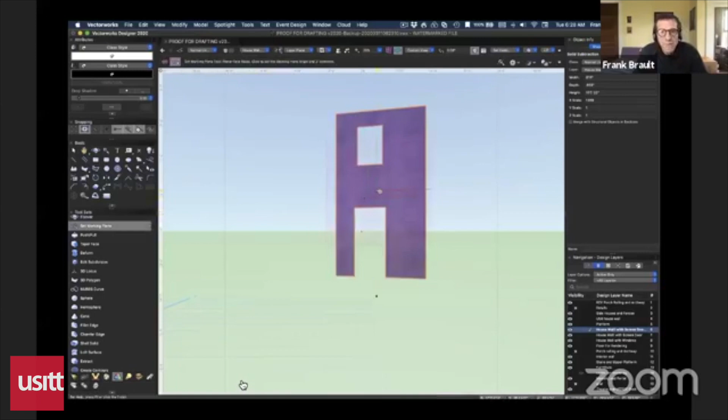If you're working in Vectorworks, you can share the model with your tech, and the tech director will be able to develop their construction documents. Here, I've separated out one of the flats, and I'm using the working plane tool to look directly at it, and now I'm going to use an invert or rotate command to get the backside of the flat.

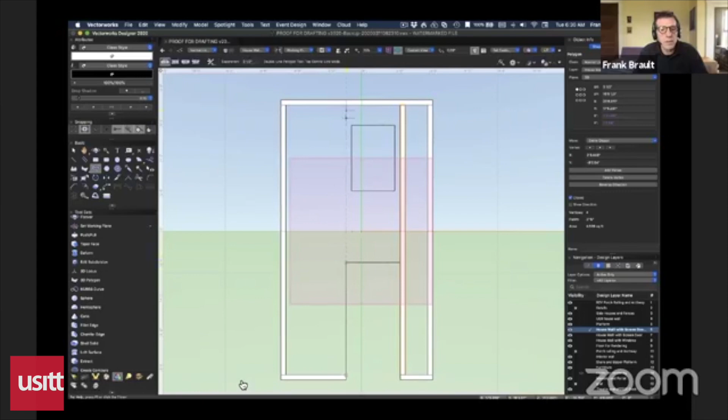Now I'm going to use the double line polygon tool. Not too many people do this, but I'm able to frame this elevation directly on the scenic designer's work, just taking polygons and drawing them out, and it's very quick. I sped up the video here due to time, but it took about 7 minutes to make this all together. Now all I have to do is those pesky diagonals.

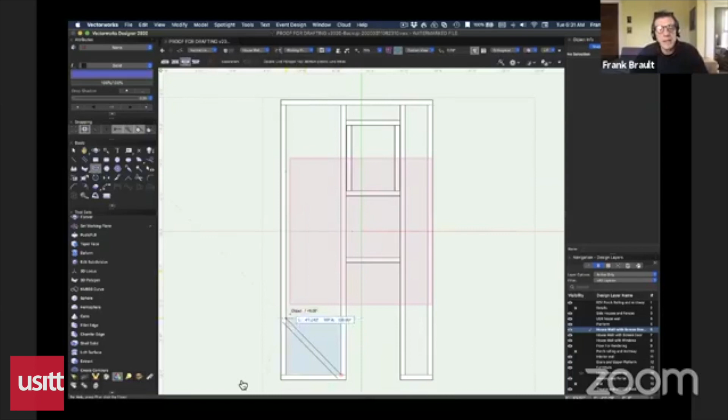For the diagonals, I'm just going to draw them in and let them overlap for a second. Then I'll use Vectorworks' very nifty clip surface command, using the overlapping lumber to make the clip. And there you go.

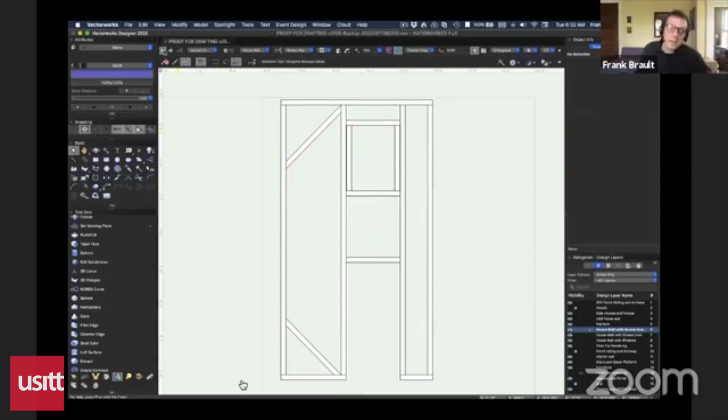So I offset it, and it's ready for dimensioning here. That's about it, looks ready. I'm going to continue.

Seems to be going backwards instead of forwards here. One second, let me get my buttons right.

There we go. So one of the new features in Vectorworks 2020 this year is our interactive patch function for lighting designers and programmers. There's a little video to go with this. It's an entirely new way to patch your show that you will recognize because it's the functionality in lighting consoles very often. You can start by putting your fixtures on the truss the way you normally want to see them.

Whereas in the past, you would use a Spotlight numbering tool, which is still there in case you prefer this method, now you can open up the patch window in Vectorworks, see your fixtures arranged by position or type, ready for numbering. Everything is interactive.

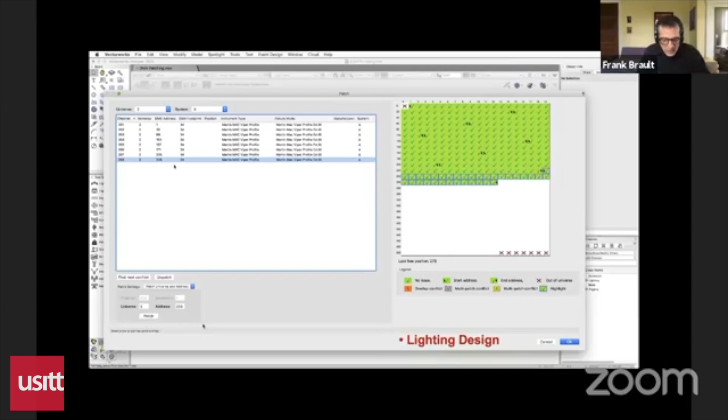It's fault tolerant, where you can start the process of numbering, and if there's a conflict, you can drag the representation of the various fixtures around so there's no overlap. In this example, we have 2 different types of fixtures, and we patch by fixture type. When that's done, we see there wasn't enough room, so then we switch to the second set of fixtures, just dragging that second set to the next universe.

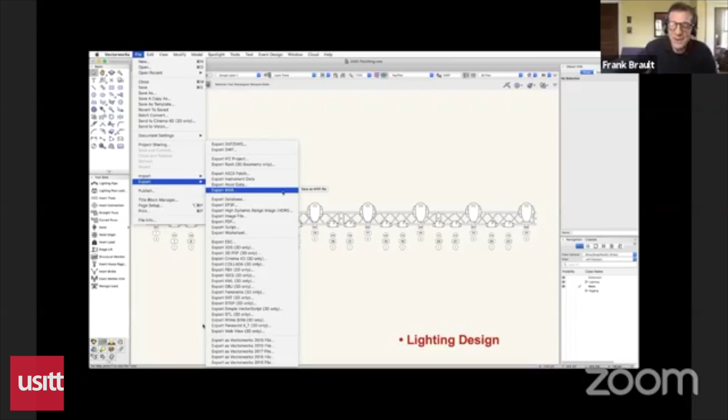So that was pretty straightforward, hopefully. It's a little hard for me to see everything going on at the same time here, but okay.

There's a few rigging updates supported by Braceworks, our load calculation add-on, with hinged truss elements which keep track of the weight applied to the individual sides of hinged truss connections.

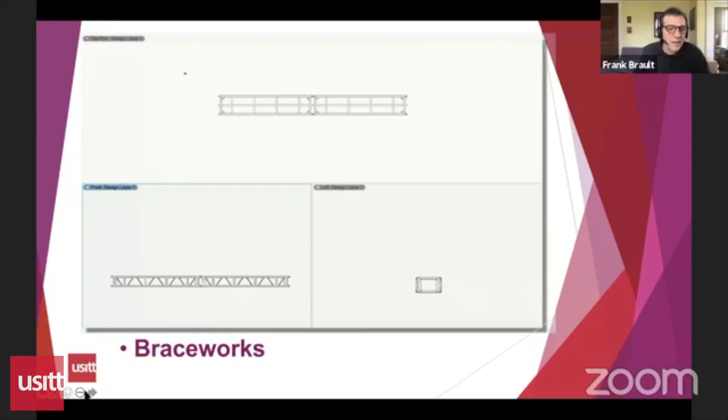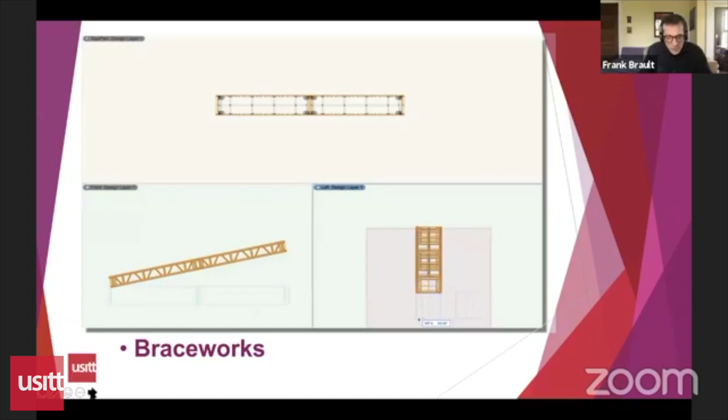I'm going to start the video for this. It's all new. We now support tilted truss so you can use the rotate tool in any view. Now you can have all sorts of tilted truss in your designs, and this has also let us simplify the truss libraries because there's no longer a need to have separate horizontal and tilted versions of our truss objects in the library.

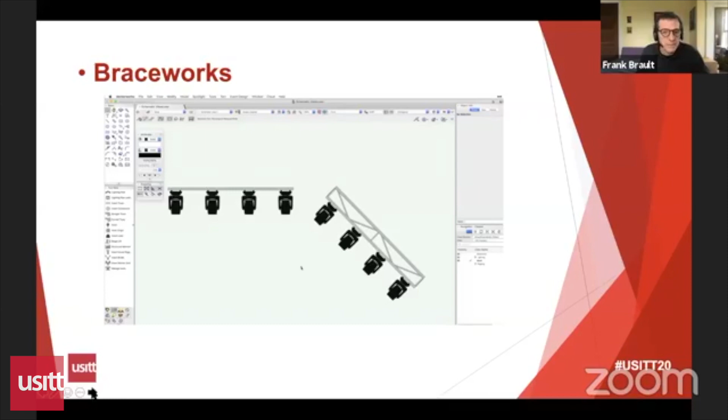When you are working in a model-based environment, you don't want to duplicate any model elements because all your quantity takeoffs are going to be inaccurate. Yet we still want to see multiple simultaneous views so that you can understand all the aspects of the design. So starting in 2020, we now support schematic views of our truss objects.

And I think it's rather well done. The schematic views are exact duplicates, but they don't duplicate the quantities. Here you can see the original truss models and the additional schematic views of the same objects. You can have the truss in top plan and create schematic views that don't show up in the takeoffs. It's like magic.

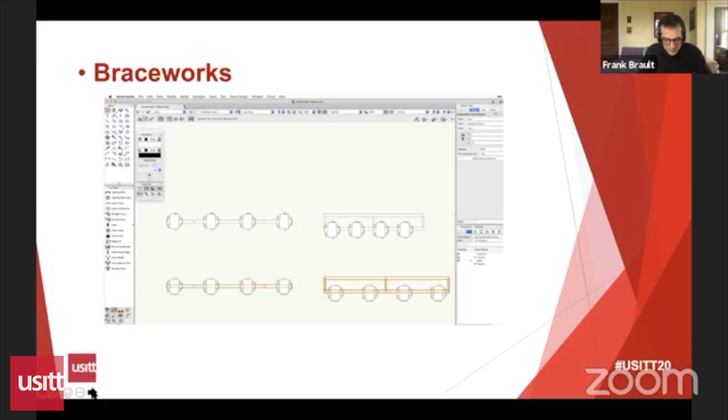These schematic views can exist in multiple views, even in the same drawing space. And when you move the fixtures attached on any view, all the others update as well. So dig that.

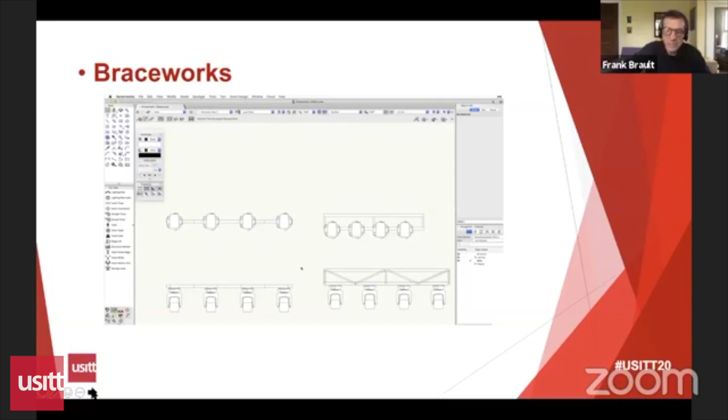Vision. Okay, let's admit it, shows are getting more complicated. Moving lights and associated DMX, sACN, ArtNet, controlled effects like projections and so forth, and haze, animated scenery, making shows spectacular, but they also make them way more complex than Lekos, Fresnels, Parcans, and stuff that I used to use when I was designing back in the 80s or the 90s.

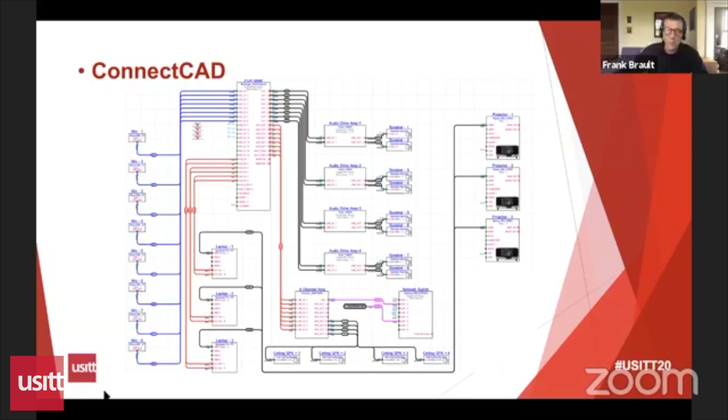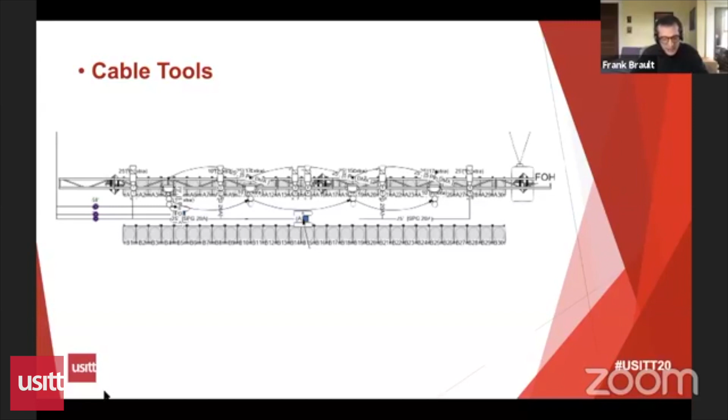This pairs quite nicely with our cable tools feature, which we introduced in 2019 called Cable Tools. It's used on scale drawings instead of in a schematic view, to plan the cable runs, as well as tallying the quantities and the general lengths of the cables.

Okay, training. I'm going to start talking about free stuff now. We have made all of our training available for free during the pandemic. I just want to go through some of these training options that are now free. I'm going to start this little video.

So we have 3 levels of training. The free stuff on YouTube, that's still free. But now we also have premium training videos, which you usually have to pay for. All of these videos that go into a lot more esoteric features and do so with a lot more detail are free for the time being as well.

And finally, we have classroom training. This in-person training is where a Vectorworks employee teaches you in our facility, and you don't get out of there until you know the product. Folks, this is also free for the duration, and all you have to do is get yourself to our office, and I think they even provide lunch. Don't say that. Don't quote me on that.

All right, training comes in two flavors: core concepts and intermediate concepts. And you can see a schedule of these on our website. And there's the schedule.